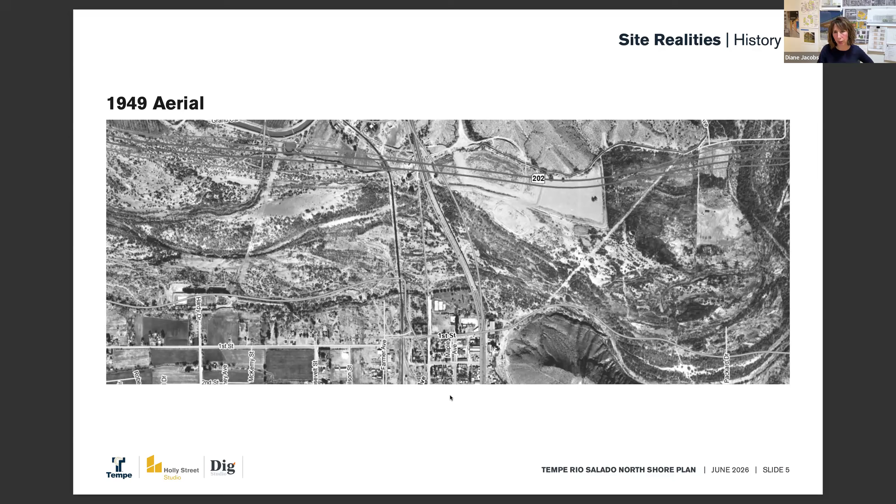We go back in time to understand how that influenced the landforms, the crossing, the enjoyment of this area, and the very important mitigation of times of flooding.

In 2018, Holly Street Studio put together a master plan that began to define kind of activities that could take place based on the topography and connection points and many other things, the activities that could take place around Tempe Town Lake.

And you can see, for those of you that have been in the valley since then, that a lot of these activities have taken place in terms of passive and active recreation and development, both public and private, along both the north bank and the south bank of Tempe Town Lake.

What's interesting is that the loop is pretty well traveled, but the northwest portion, the activity zone that we're here to talk to you about, is still kind of in need of activation, revegetation, and other things. So that's what we've been focusing on since the early part of this year.

In 2018, we decided with all of this information to put together a series of guiding principles. And again, this came from a lot of you and from all of kind of the analysis of the area.

And the guiding principles for Tempe Town Lake was that this area is really something that should be embraced by and owned in many ways by the public. There should be a balance between special events and everyday experiences, but this is really a place for everyone.

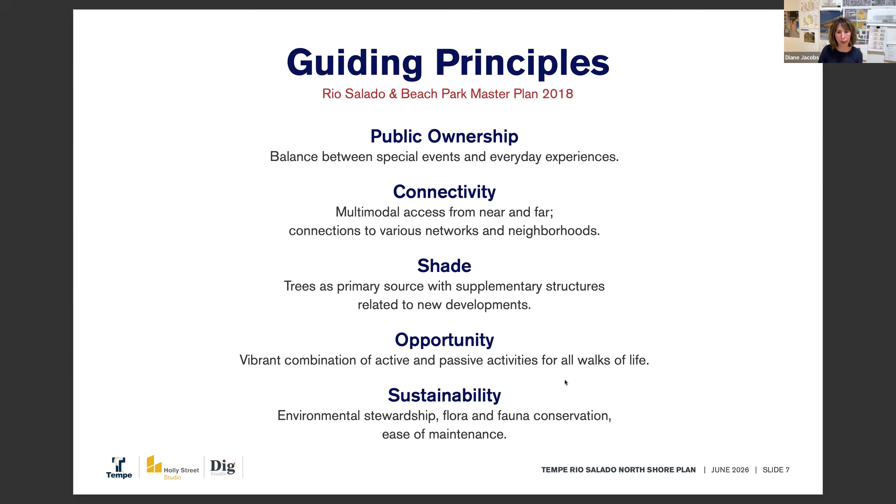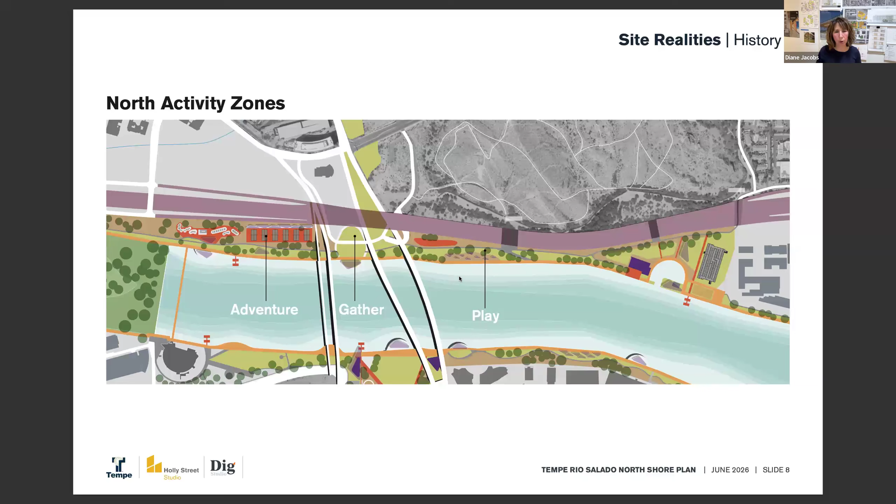So now, as you know, we're focused on the North Bank. The way we were able to define this area was to use the topography as an understanding of what would be possible there. The west side of the North Bank was designated as an adventure zone, and we'll get more into that as we move along. The center portion, directly connected to parking, the Marquee Theater, and other access points, we think of as a place for gathering. And finally, on the east side, we are connected to the marina and other active zones like volleyball courts. We are considering this area as a place for play.

Now we're going to talk a little bit about why this came to be. Sorry, go ahead, Brandon. No problem, I was excited to talk.

As we touched on last meeting, for those who were able to join, the next step as we progress from a high-level master plan into a detailed concept plan was getting into site understanding and understanding the constraints and opportunities that exist in this interesting piece of property bordered by the 202 and the lake. One thing noticed immediately was the lack of ecology and vegetation on the site, and a desire to restore that and connect to our neighboring parks to the north, the Lo Piano Bosque and the greater Papago Park system.

I think there's a tremendous opportunity with that. And as Diane mentioned, the significant amount of topography on the site, both ducking underneath the 202 and also reaching up towards it, offers some challenges but also some amazing opportunities for program and views. Next slide.

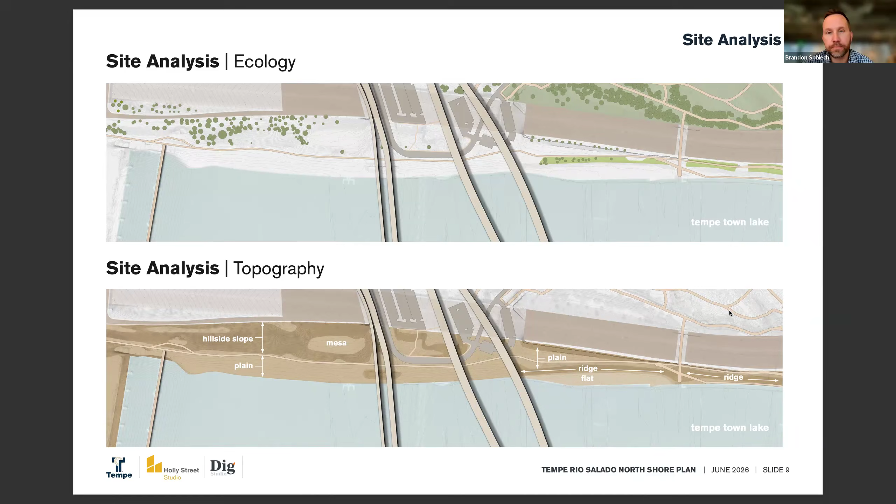Ownership is something we've continued to uncover in terms of operations and restrictions and what's possible, from what the city of Tempe owns to what the railroad owns, to ADOT's land. All of these things factor into what can and cannot be built in certain areas, as do underground constraints you can't see when you're out there, in terms of various easements, overhead power lines, underground sewer and water — a network of regional infrastructure that winds itself through this area. Next slide.

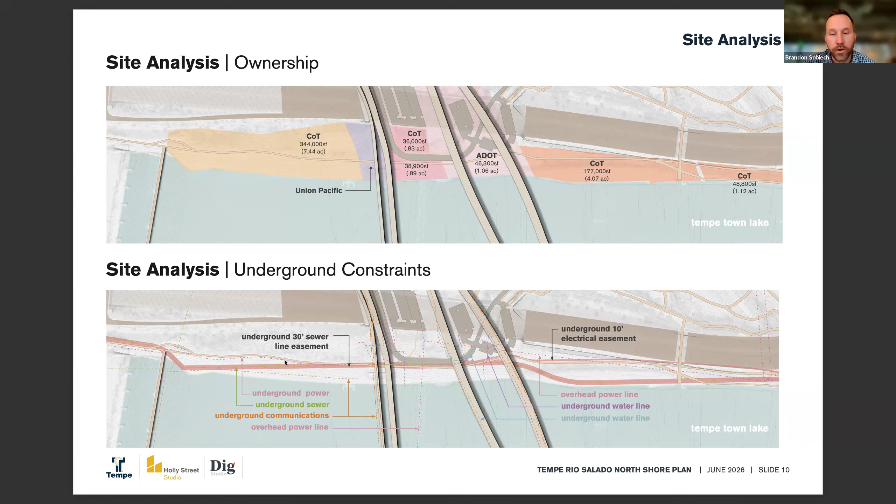And then you can't forget about the intent of the lake, that this is a river and it does fluctuate and flood, and there's a major flood control aspect of this project. We need to respect that levee and what it provides in terms of safety and flood control, and also consider access and parking — understanding the spaghetti network of how to get down there, what's built, the limited room for expansion in terms of parking and access, and how we can potentially increase that. Next slide.

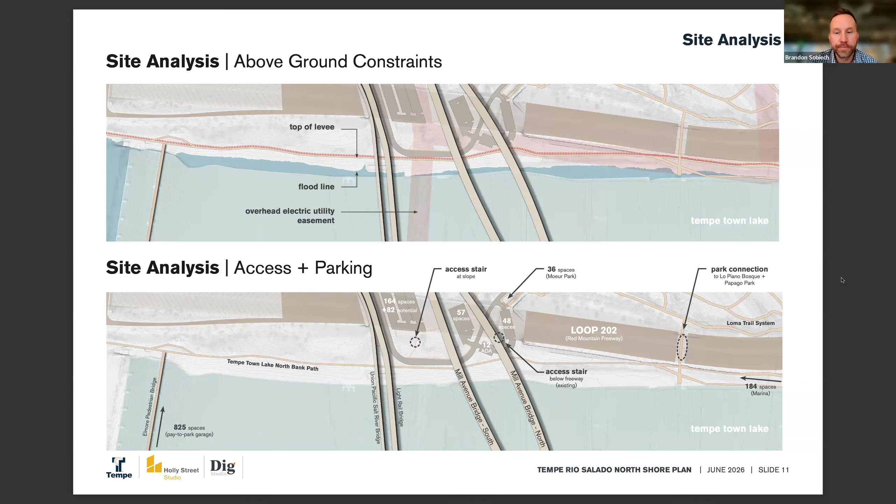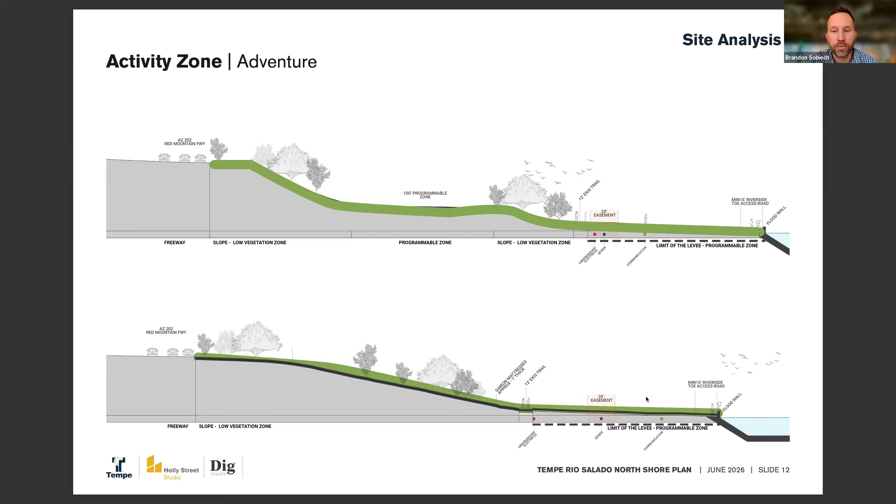Secondly, after looking at a plan view of all these things laid over, one interesting thing about this piece of property is how much it expands and contracts in width, and the topography that comes with that between the 202 and the lake. So this was working through the different zones, taking a sectional look at the park, understanding where opportunities may exist to create program and landscape opportunities. Underneath, in that black dashed line area, is the limit of the levee. We've met with the Flood Control District and understand some of the constraints around that.

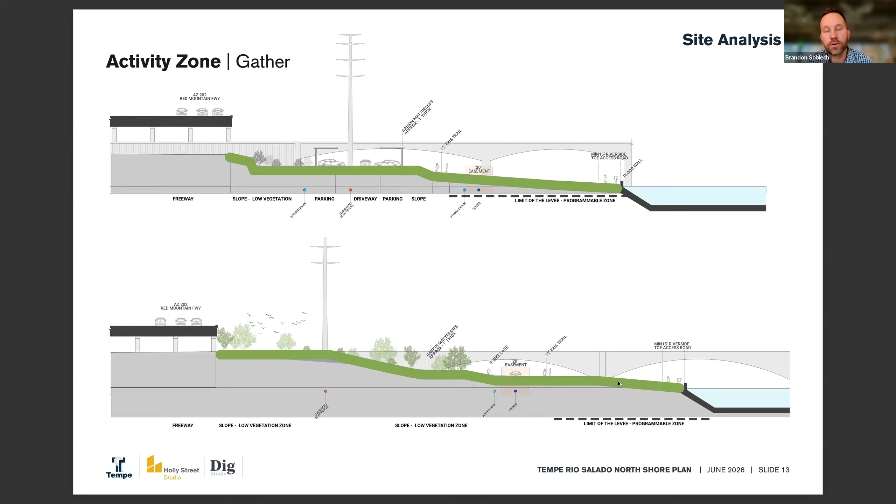But also some opportunities to revegetate and make that area very nice. Especially when it becomes the center of the park, it gets much more dynamic with the bridge section, overhead power lines, and connections under the 202 — a lot of things to consider as we look at plan layouts. Finally, as we move furthest east towards the marina, the section gets much tighter and includes reinforced subgrade sections for the levee that we need to be aware of, but also opportunities to connect to the north through these little passages under the 202 that can be activated in a creative way.

Just a quick comment about these analysis slides that Brandon was describing. On a certain level, if you look from up above, it seems like this tiny little spit of land, but it's important that everybody understand it's 20 plus acres with quite a variety of topography. With the freeway there's almost an impossibility for a project like this, but when you really walk the site at different times of day and look at the topography, the different slopes, and the adjacency to the water, it's quite interesting and exciting. It's kind of constraining, but pretty wonderful when you look at the different opportunities.

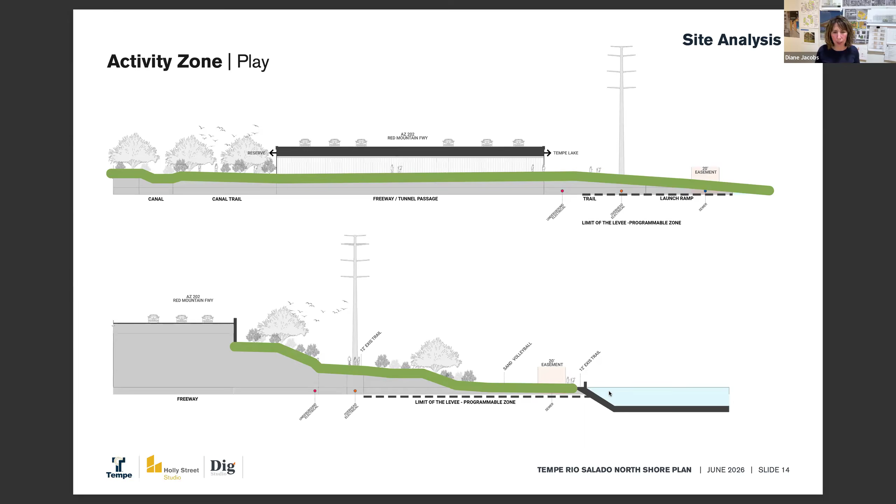So let's talk about public input. At the end of March this year, we got together and shared some of these ideas. We had a little less in terms of a design strategy, but a lot in terms of analysis and precedent in other cities. We spent time together actually looking at the site because we were at the Tempe Center for the Arts, and we did an overview of the project.

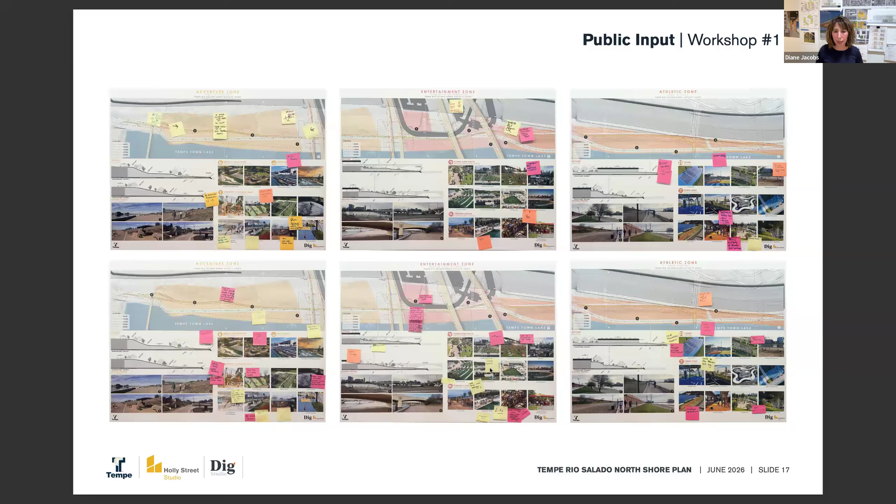We invited folks to come and talk one-on-one and share their opinions about what we had found and their desires. We spent a lot of time, as these meetings allow for, writing on Post-its and getting a lot of really great ideas about what was desired here, plus input about what most folks wanted to make sure didn't happen in this zone. You can see some of the photographs of the board and the long table maps we talked over and spent time on together.

Let me go back a second—this is going to happen again tonight, so hopefully some of you can join us.

With the help of the city of Tempe, we issued an online survey, and over 1,300 folks went online and took a look at what was going on. We got over 1,000 responses, so there was quite a robust amount of public comment and input on this project, which makes our job a lot easier because it's really nice to get these ideas and input from the city.

So the key takeaways, and there were many, but I'm going to go over 12 key points. There's a lot to them, but let's see if we can generalize a little bit so we can get to the concept plan.

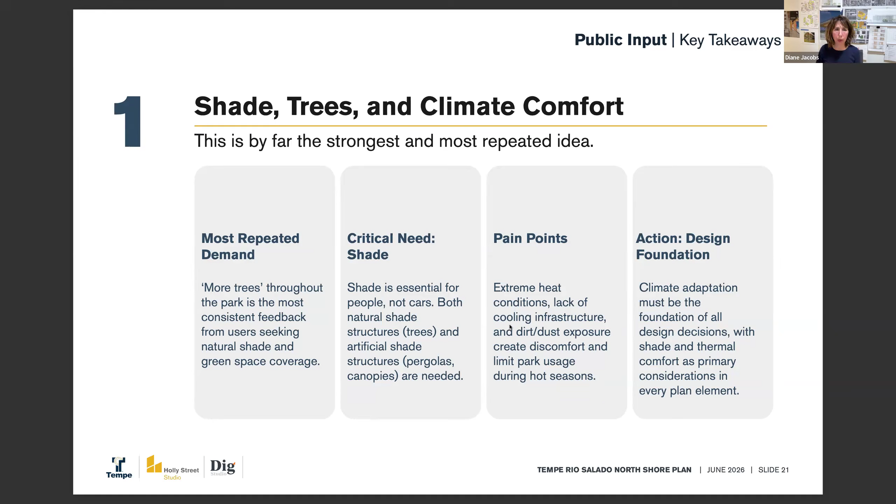By far, the strongest and most repeated request was that this area embrace shade, trees, and comfortable microclimates. No one is surprised by the essential nature of shade and the extreme conditions along this path, and in order to use it, that should be a critical component of our design.

Again, you are just south of Papago Park and the Sonoran Desert. The idea here is that we use this opportunity adjacent to water to make sure the lake connects to an ecosystem that is natural, alive, and embraces the desert landscape.

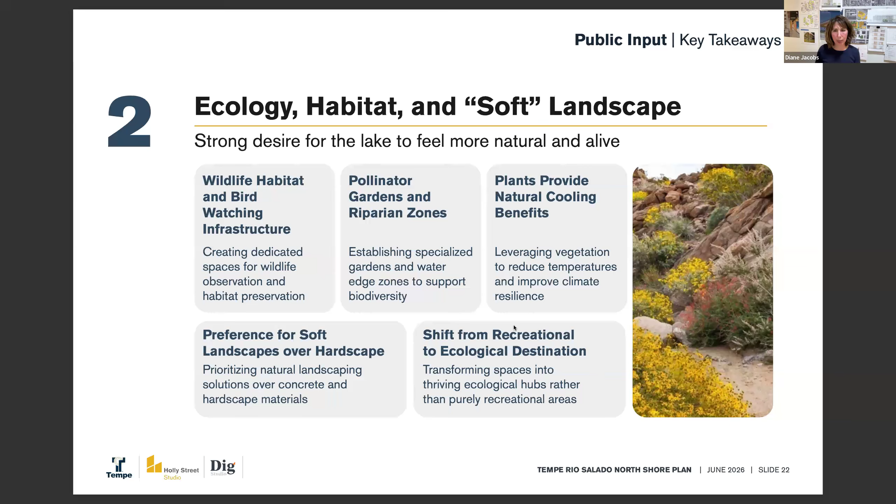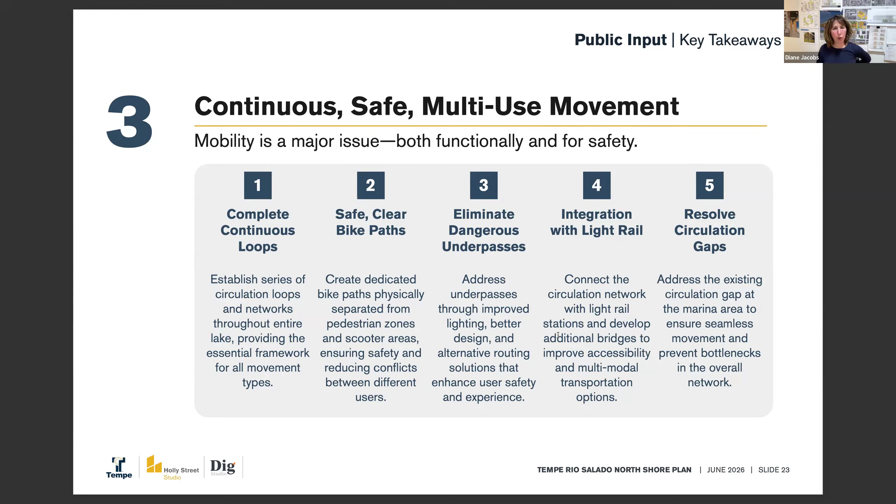Making sure we embrace the idea of the Tempe Town Lake being a continuous, safe, multi-use pathway—not just for people walking, but for bicycles, skateboards, all different modes of travel, with integration with the light rail—and making sure we resolve some circulation gaps that exist when you look at some of the pathways currently there. People in Tempe, and people in general, like to move and engage in recreation and fitness.

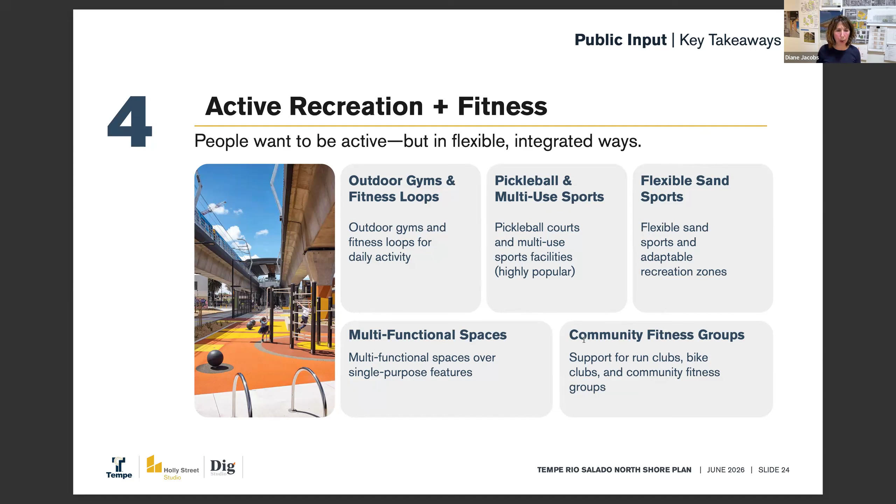Again, it looks like a thin strip of land from far away, but it's actually quite a bit of acreage where we can encourage outdoor gyms, fitness loops, and other sports activities, passive and active. There are ways to connect with partners who can come in and participate in the expansion of programming and different opportunities along the North Shore.

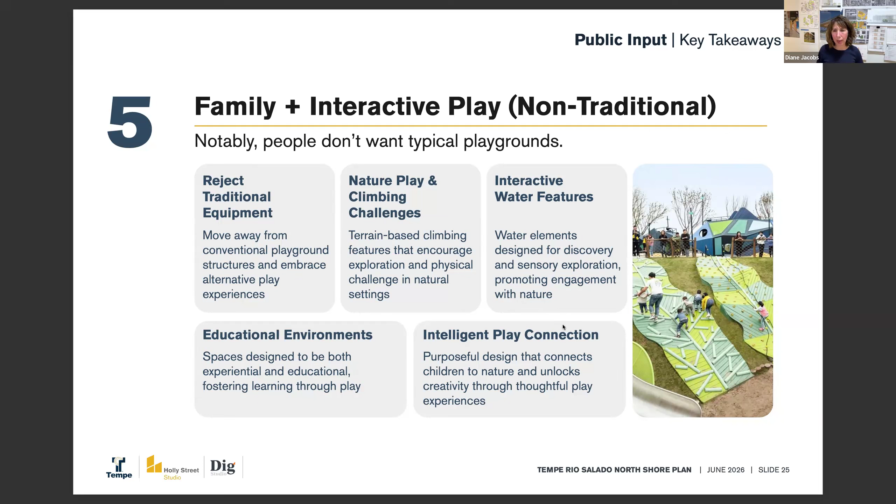Families love to frequent this place. This is a public area that should last for many generations and help continue to create memories. But it was important for people that this not just be like a city park, but a place with interactive features, nature play, intelligent play connection, educational environments—kind of a rejection of traditional playground equipment for this area. The topography and adjacencies of the pathway make this a wonderful place for that to happen.

And of course, being right across Tempe Town Lake from Tempe Beach Park, the idea of consistent programming—maybe smaller scale entertainment, organized groups for fitness, festivals, and other activation opportunities—were important to the survey respondents as well.

Food, beverage, and light retail, and something more, integrated with nature and activities taking precedent. The idea we heard back from many people was that it would be great to have smaller scale food and beverage opportunities there, like cafes, locations for food trucks to park, maybe micro retail, a place for festivals to occur—not necessarily commercialization, but places where these sorts of things can come and go, or maybe live there in an integrated way.

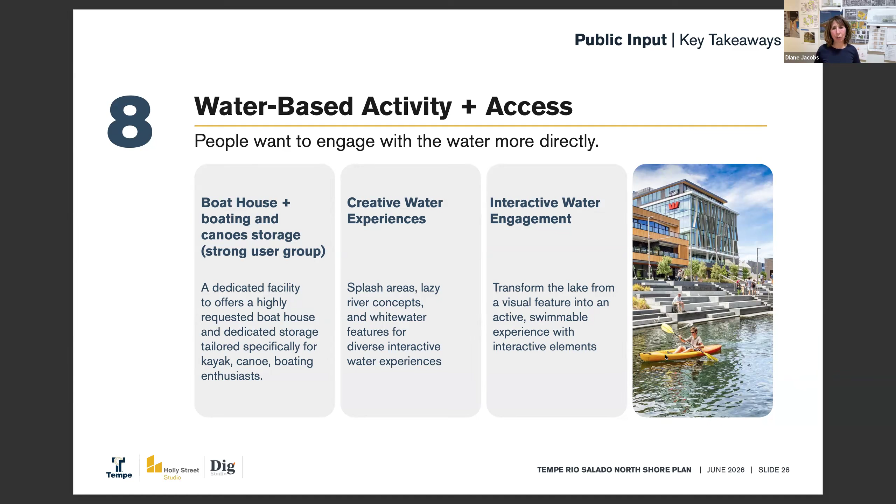Water-based activities. We're reminded by our engineer colleagues at the City of Tempe and many others that Tempe Town Lake is not a swimming hole, but that doesn't mean we can't lean into some creative water experiences along Tempe Town Lake. That was something embraced and talked about in our surveys.

Identity, art, and uniqueness. This is something we like to embrace when doing projects that can have an artistic nature to them, like multi-sport courts or play zones or different signage and wayfinding—not necessarily art as an object per se, but sort of artful play and integration with the amenities that are there.

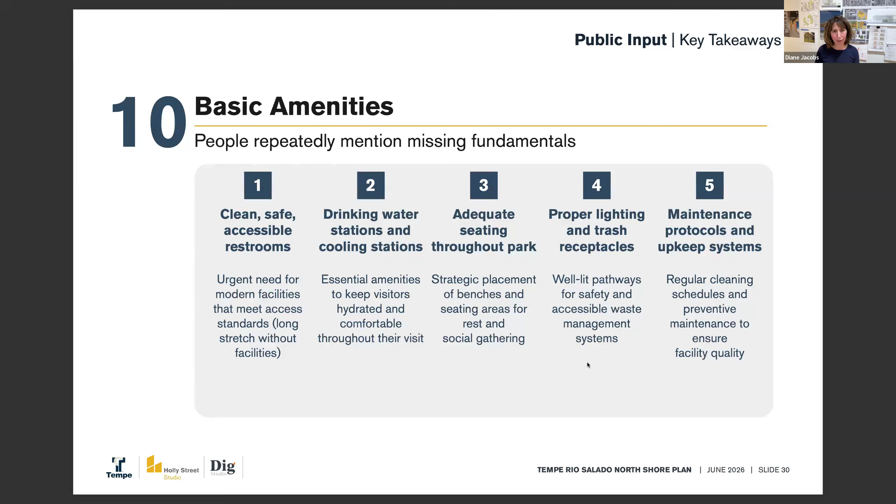Finally, the need for basic amenities: restrooms, drinking water, seating, lighting, etc., making sure it's a place that is easy to keep pristine and lovely all year round. That goes along with safety, cleanliness, and maintenance.

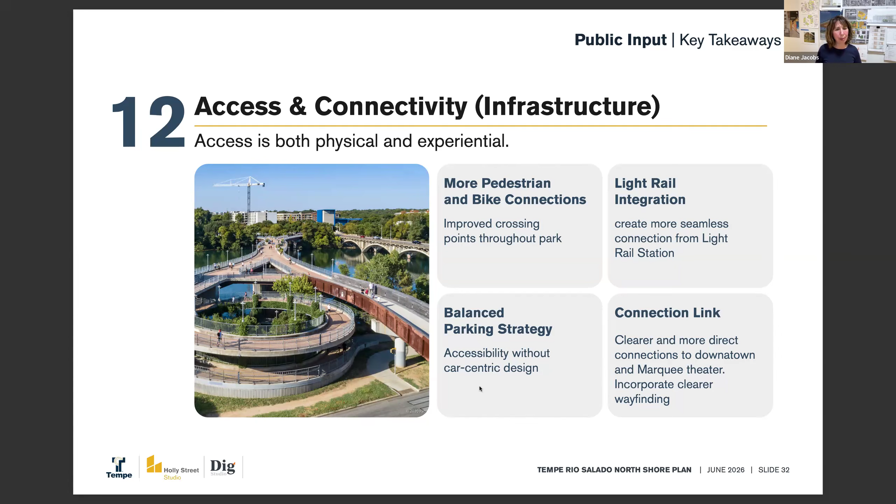Number 12 was access and connectivity, making sure folks can arrive there in ways that align with accessibility—maybe not car-centric arrivals, but also pedestrian and bike connections, connection with the light rail, maybe even connections from the Mill Avenue bridges. So being able to walk across and come down to this zone with relative ease, and maybe some celebration, something playful in that way as well.

So after listening to everyone and incorporating some of the analysis, there are some emerging ideas that are leading to a conceptual plan that we'd like to share today.

We see 10 design drivers for this plan under 3 categories: site conditions—the reality of that area and what we need to work with and around; public aspirations; and the possibility of partnerships, collaborations, enhanced amenities, making sure communities like the boating community and gardening communities have opportunities to connect and help make this place not just something run by and funded by the city and taxpayers, but connected to other endeavors as well.

So Brandon's going to take us through what these drivers mean in physical form.

Starting with the site conditions, not to state the obvious, but to state the obvious—the water obviously plays a primary role in its effect on the park space, and that visual and physical connection to the lake corridor.

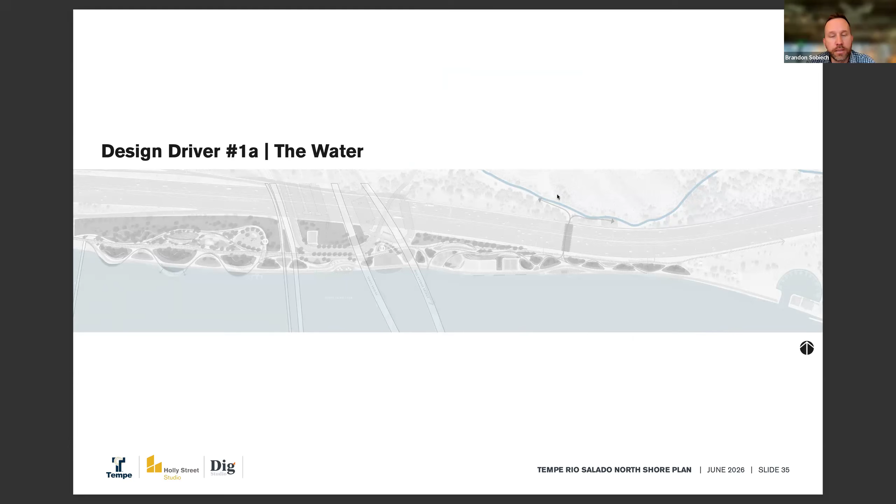The response to that is this desire to continuously engage with the water and offer more chances to interact, view, stop, and reflect along the bank itself. So beyond just an access or maintenance path, how can we create a promenade with a lot of different things going on, offering a variety of ways to interact with the lake edge.

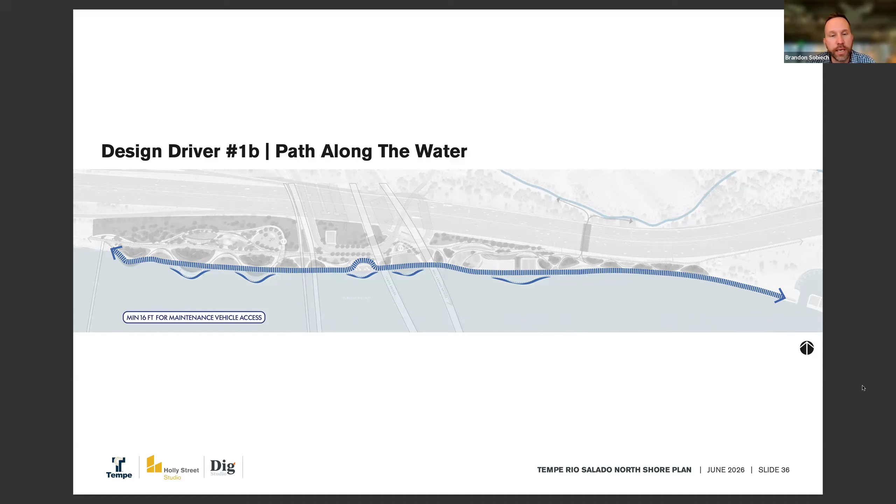The second design driver is what we talked about from the sectional cuts—the levee and the restrictions that guide any... getting some background noise... and any restrictions that may exist from the levee itself.

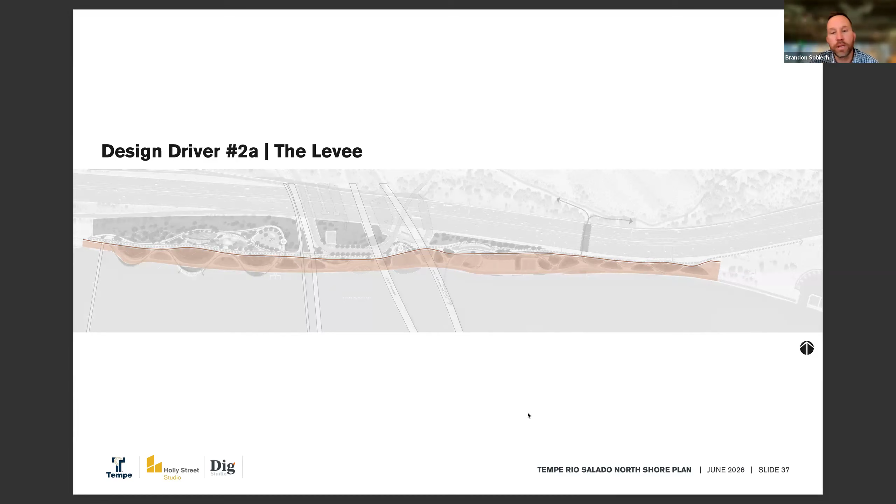But there's this strong desire for movement that happens on top of the levee in the current multi-use path configuration, which is also needed for logistical reasons as well.

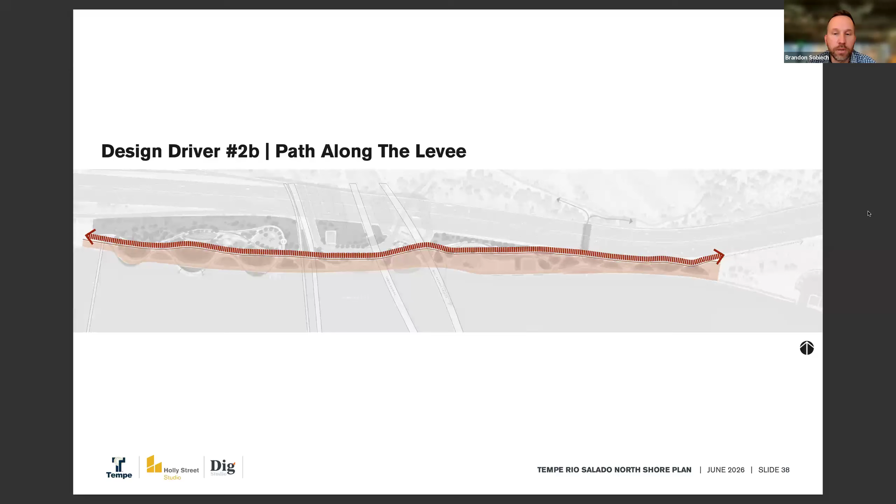And then we see a tremendous opportunity with this green space that we're calling the slope, both from program, from view, and from vegetation.

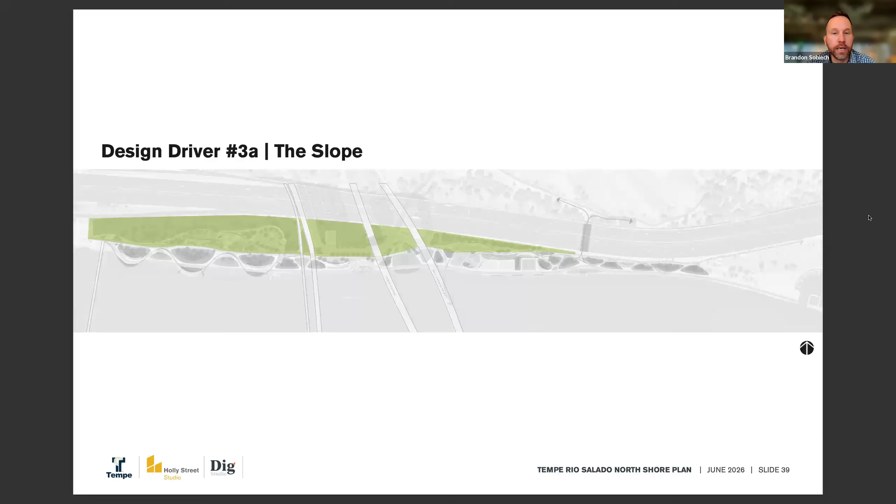And to also create a secondary path system offset from the multi-use path that allows for this more passive, park-like experience that goes at a slower pace.

The final site consideration is this idea of connectivity, like Diane was mentioning from the 12 summaries from the community engagement—looking beyond the limits of work of this North Shore and how this can connect regionally in different ways.

The first is looking at the Mill Avenue Bridge system, especially with the multi-use path, and how we may be able to create a direct connection down into the multi-use trail system. We're also looking north through the 202 to the Lopiano Mesquite Bosque and the Papago Park area, and how we can connect to that regional trail system, as well as looking fully east and fully west as Tempe Town Lake ultimately completes its loop trail.

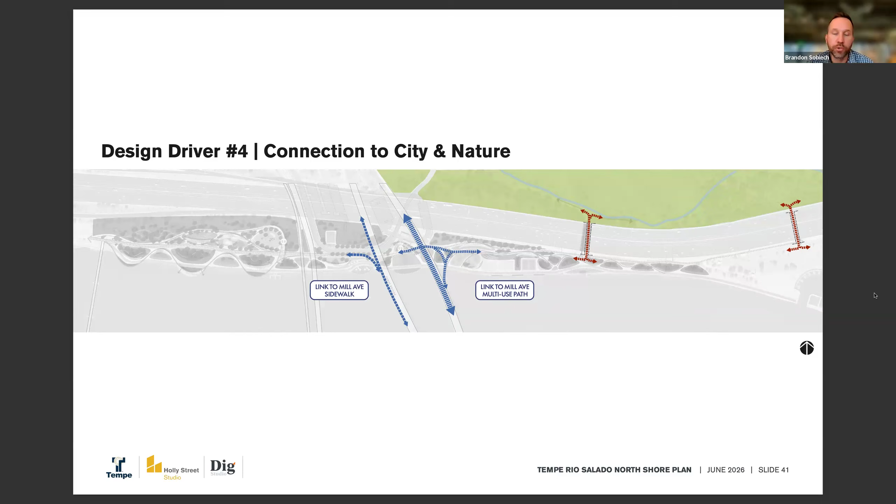So what does this mean for stuff to do? A big part of the design driver, in addition to the site issues Brandon mentioned, is how to put things along this pathway that give us a reason to stop, to get together, to stroll, to move through, or maybe just cross through on your way to another activity at another location.

You can see along the entire North Shore Park that the southern portion needs to be relatively quiet in terms of construction because of the levee requirement. So the activities on the west side would be more on the adventure side.

We used to call this center section entertainment. There was talk about an amphitheater or other amenities like that, but we really see it more as a gathering zone. You'll see some areas, big and small, start to emerge in the plan.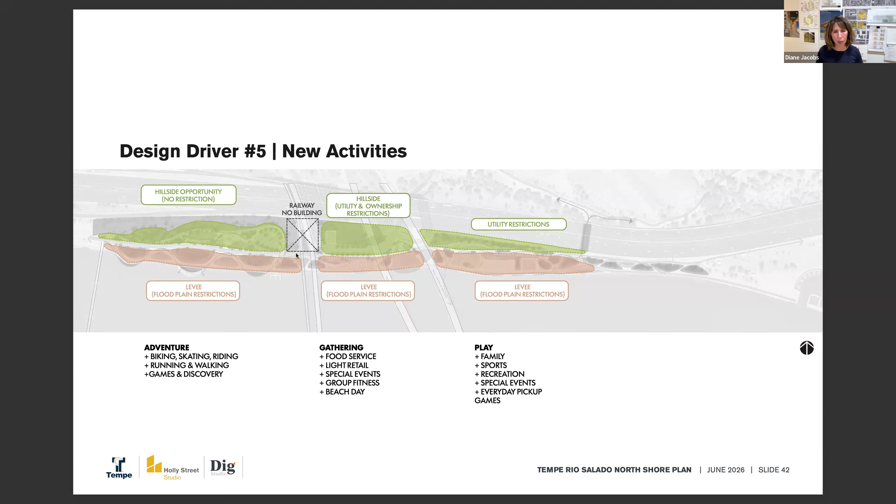The activities in this design driver are tied in with what the topography will allow, but also some playful opportunities with what's going on under the freeway, under the bridges, and how the paths can move through and along that waterway.

We also looked at access and logistics — what user groups are associated with each amenity, what that experience is like getting there, and how that shapes where the activity should occur on site. Because of restricted access and parking location, this is really a center-out kind of experience with a braid that winds it all together.

If you're traveling by bike or skateboard, it's a much different experience than traveling by car to go to a small concert or market or event, where you might have a cooler or a stroller with you.

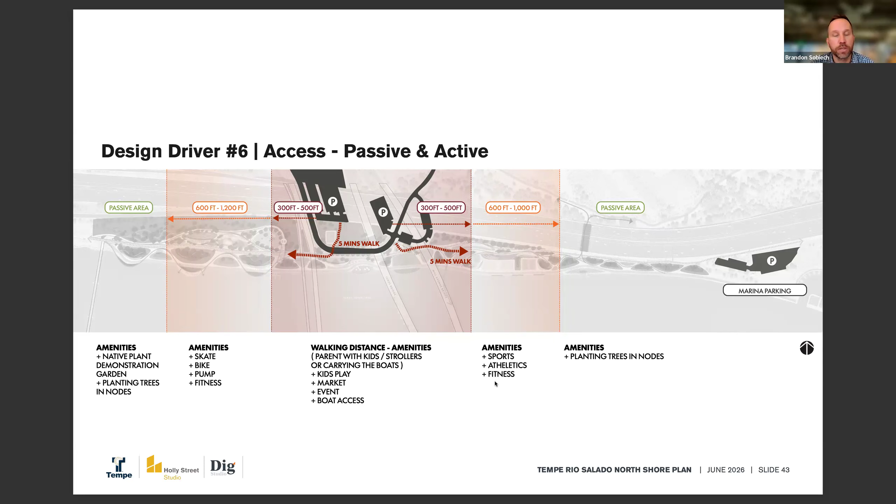Taking all of those things into account and applying them to the various amenities, this diagram starts to indicate where things like event markets, food truck areas, or playgrounds should go, assuming toddlers only have a certain walking distance, versus amenities like skate spots, bike spots, or fitness courses where the reach is much greater. We use this as a driver to help arrange amenities appropriately.

It's no surprise that art continues to be very important to the city of Tempe. Dig and Holly Street worked on the Clark Park project, and there was almost as much embracing of wayfinding art and playfulness because of the folks who participated as there was architecture and recreation. So it seems like this would be no exception.

We know from our analysis and countless walks along the North Shore that there are art pieces there with a connection to stories and people from the past and present. The idea is that this existing art is notable and part of the context and the drivers.

We also know there are opportunities at entry locations to create landmark moments that welcome visitors and connect to the broader community — could be interpretive, with information about what you're seeing and where you are, but also, like many cities, embracing underpasses and infrastructure with additional lighting and activation of these spaces.

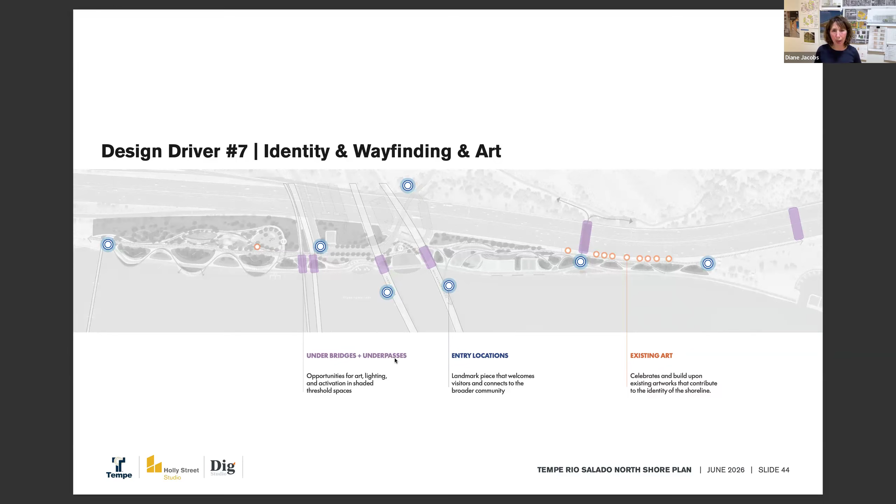If shade is so important to us, it makes sense as a community to consider the opportunities underneath and around things, in places where at certain times of year standing in the sun versus the shade makes a big difference. So using this design to help create identity, increase wayfinding ability, and integrate art directly into the amenities is important as well.

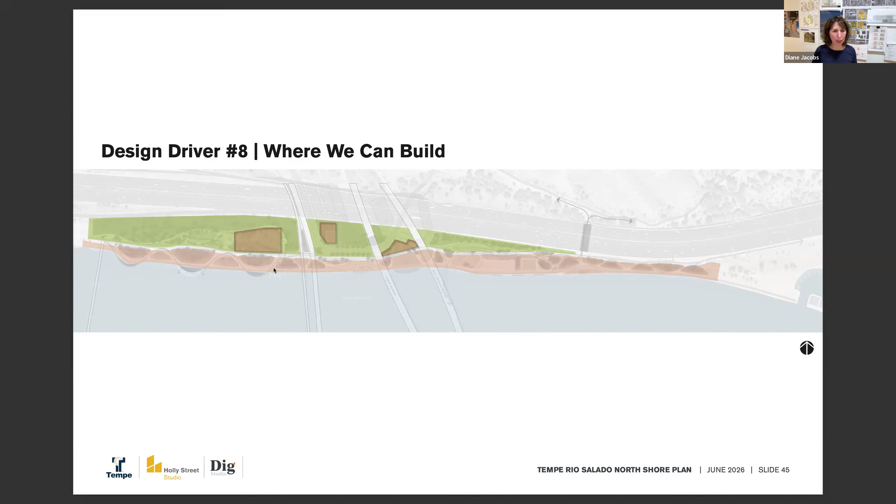We talked about opportunities to partner with different entities that might come in and help create activation. We have recreation play zones along the hill, where potentially the city works with someone that can provide adventure play, climbing, bouldering, outdoor active recreation. There's also the idea of partnerships for light retail and food and beverage of different kinds—restaurants, cafes, maybe small specialty retail zones and kiosks.

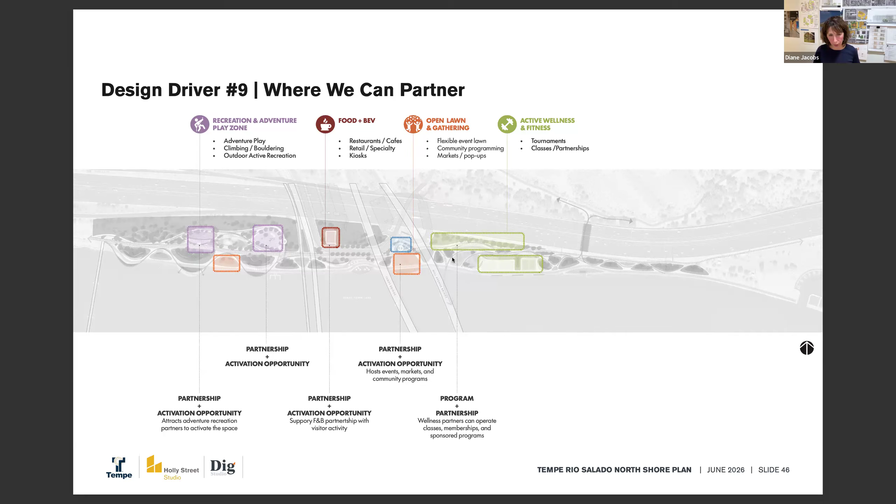And finally, design driver number ten is how do we, the city, and all of you prioritize and phase this project? There is a fantasy scenario where it's built tomorrow, but we all know the realities of this type of project.

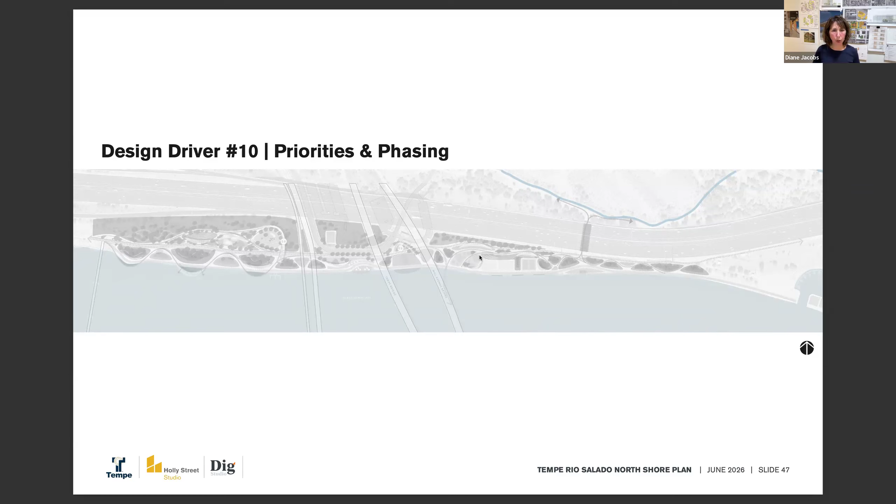This begins with a framework, begins with conversation, and begins with a concept master plan that helps new things happen in a controlled, organized fashion—one that embraces the tenderness of the land, but also the will of the citizens and the realities of the finances of how these elements come to be. So the design driver here is a conversation moving forward about what the priorities are, how you lay them down, and how you begin the work of phasing this project so it could come into reality within a certain time period.

So where we took this is we're presenting to you today the idea of one concept. Instead of little pockets where different things happen, we're presenting this as a strategy where we're creating a unified North Shore Park that addresses all the design drivers we talked about. In that singular park, we have adventure, we have gathering, and we have play—outlined as a strategy for how you might develop this area.

And the vision for North Shore Park would be something that stands as a counterpart to the energy of the South Bank of Tempe Town Lake. It's a true connection to natural habitats—you could consider all points west, north, east, and south, including the water and the lake, as natural habitats for this park.

Embracing a unique view corridor—anybody that's walked along the North Shore can see that looking back at the city is quite spectacular. It's very different from any other spot on Tempe Town Lake.

This area is a special and protected recreation destination. By protected, we mean it's not out in the open subject to other urban forces, maybe cars or highways, but nestled up against the water and up against the freeway, beginning to embrace this as a special place.

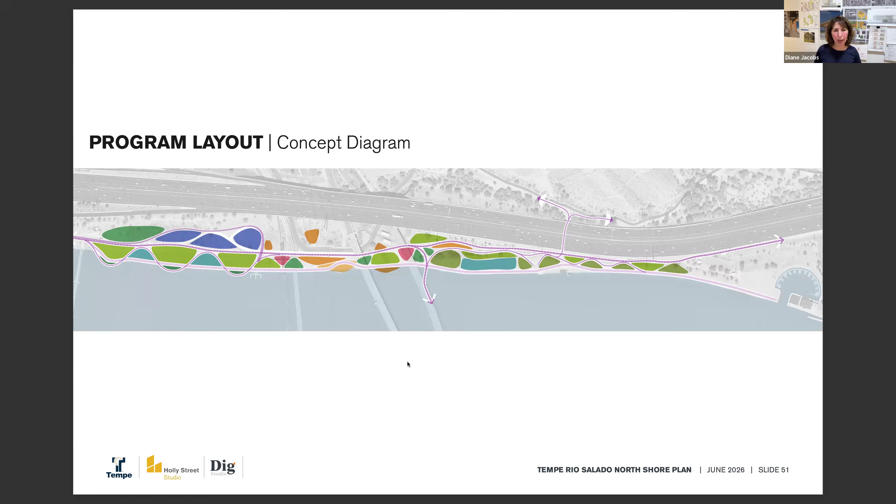And notably, the North Shore Park is a stop along a well-traveled path. The idea is that the path continues along Town Lake, and this is one of many destinations. The concept diagram begins to show how those paths and the spaghetti of the wires below and above, and the bridges, help us understand how these areas would be shaped and how the paths and nodes can come together to form a plan.

And here we have the concept diagram that we will be presenting tonight. So Brandon, would you like to share a little bit about each of these areas and what folks might be looking at when they come by?

It'd be good to get into. There's a lot to kind of take in when you look at the full spectrum of the linear park, so we'll go section by section, dissecting each spot. But I just want to note, tonight's really about listening.

I know we're here presenting and talking about the ideas, but what we're sharing is all these lenses and layers we've used to build up what you see on the screen and the reasons behind why. But we're very mid-process, and it's a perfect time to discuss.

What's on the screen, the types of programs, amenities, and ideas we'll see today, and what resonates, or perhaps what doesn't, or what feels high priority or very important. That type of feedback today will help drive the process forward, especially when it comes to funding and phasing and what comes first.

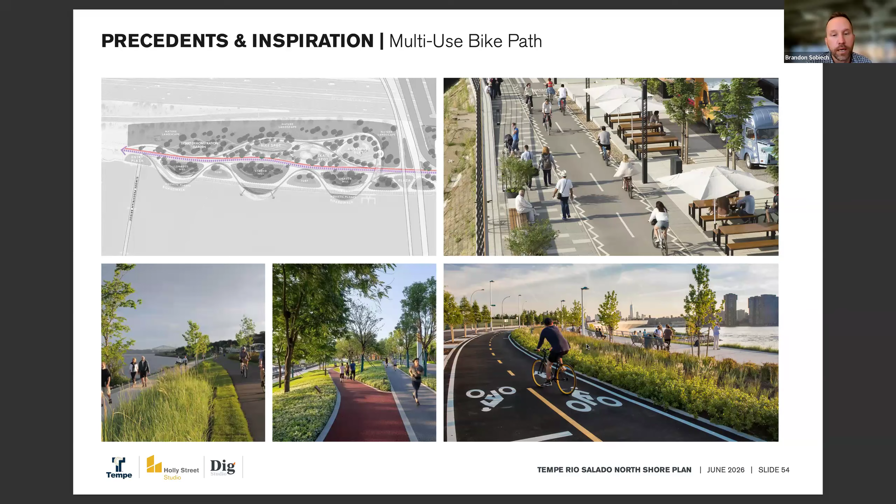Some nice examples of how that could work. The second idea is a waterfront promenade, not just the boardwalk along the edge, but how we restore green along that entire edge. This is the levee area, and there are restrictions to what we can do there, but there are creative ways to revegetate that edge, working with the flood control district, creating a landscape more appropriate for a river edge, with moments of exploration, view, and program within it.

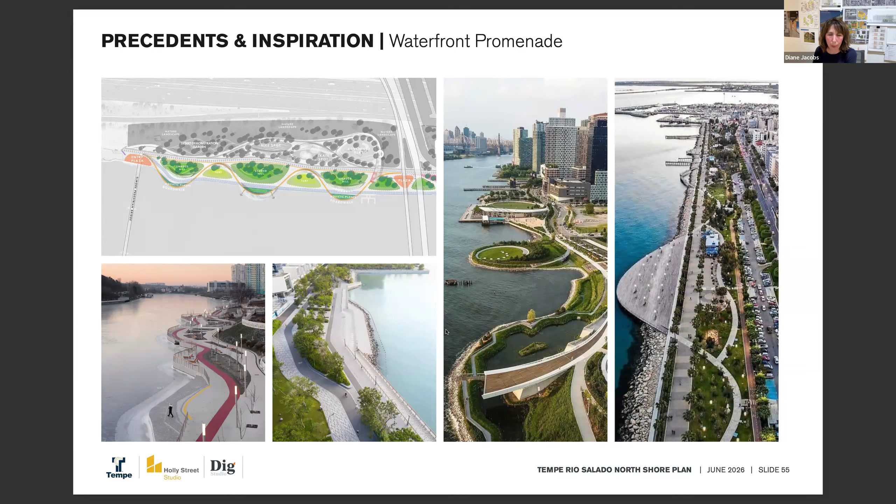It's important to mention that the connection to the water, or the integration of landforms with the water's edge, will take into account the delicate balance of water volume in the waterway relative to the edge of the park itself. It's not our intention to take up water volume, but to connect to it in a way that brings you just a little bit closer.

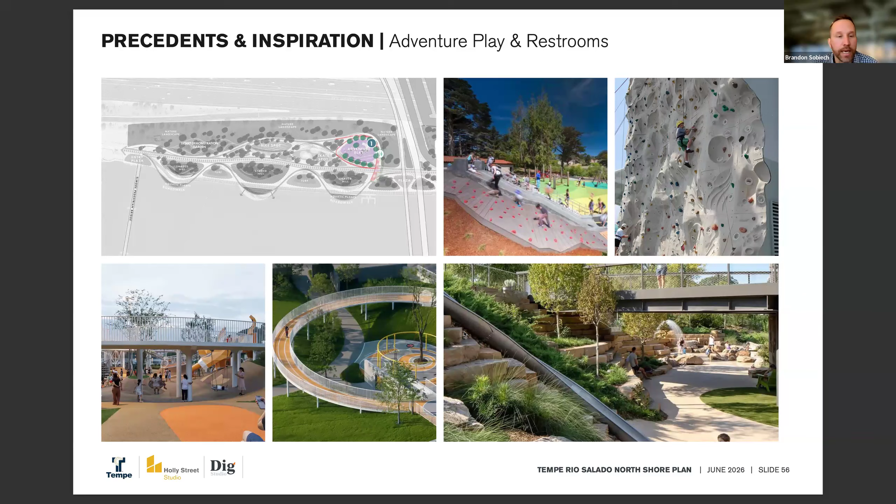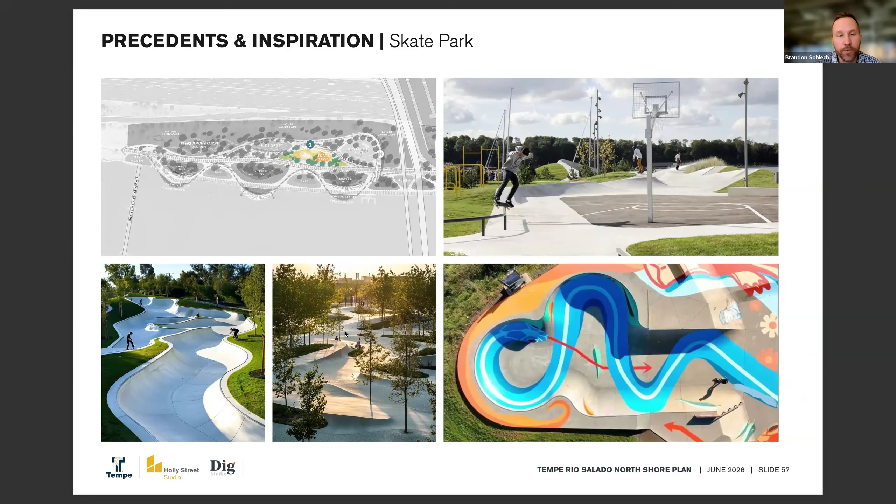Okay, so we'll go quickly through these. Like Diane mentioned, non-traditional play environments in that slope area create really cool opportunities for sliding, climbing, and integration with the natural environment. The idea of skate spots and bike spots, these little interventions in the landscape, create activity for teens and children, and also provide opportunities for integration of art, so art, amenity, and program are all interwoven.

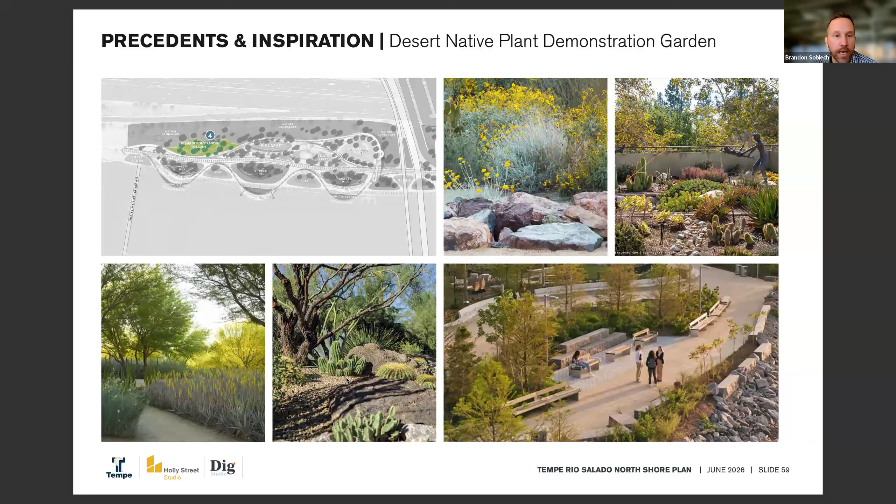And then this connection back to the natural environment, and making that inherent connection back to the desert and Papago Park.

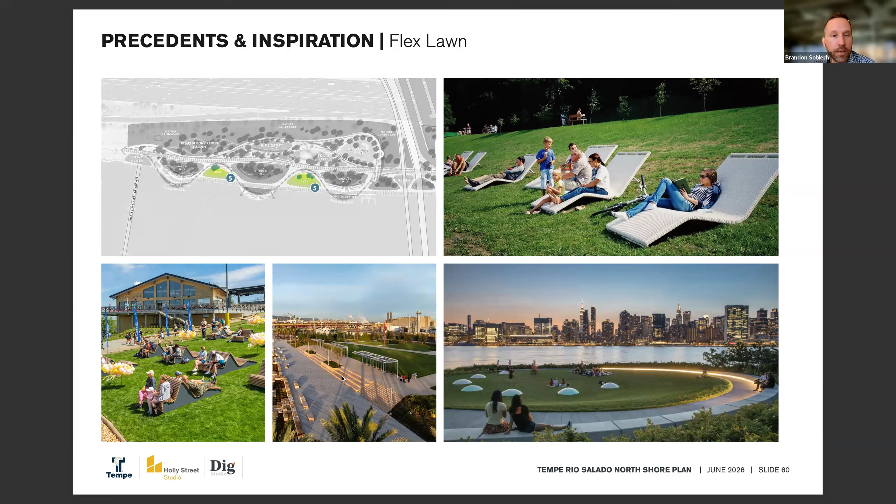Within the bank itself, or the levee itself, we're creating opportunities for viewing back towards the Center for the Arts, viewing back towards the iconic railroad bridge, just these kinds of passive lounge areas. Next is the idea of restoring ecology, using landform in a way where we're able to grow material, and the number one requested program item is tree shade, getting tree shade back on the banks.

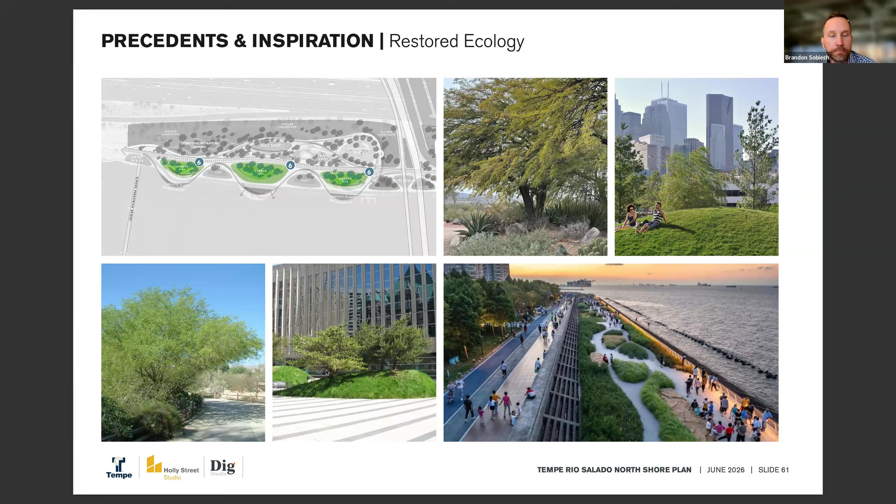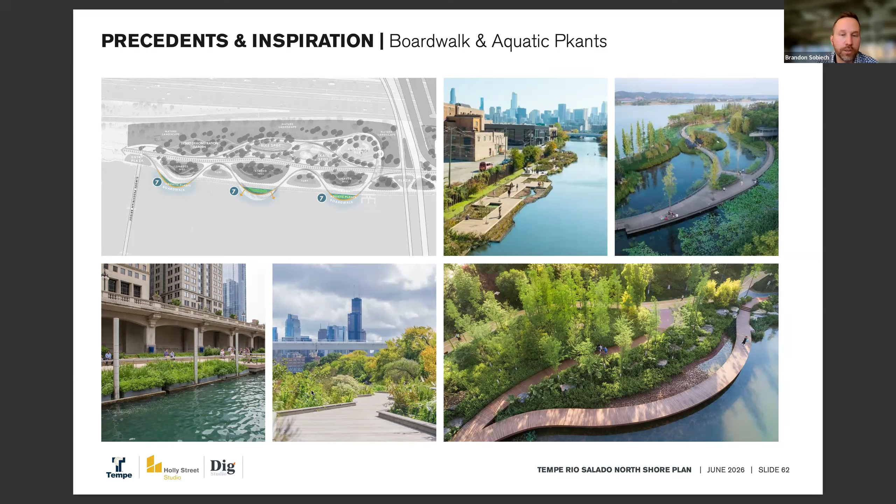Looking at ways to actually engage the water, where you're physically able to go out on it. There are a lot of boat docks and other things on the lake edge currently. Integrating aquatic plants, finding interesting ways to engage with the water's edge. And opposite of being on the water, being above it, recognizing the slope and the possibilities of lookouts that capture the view back towards the city.

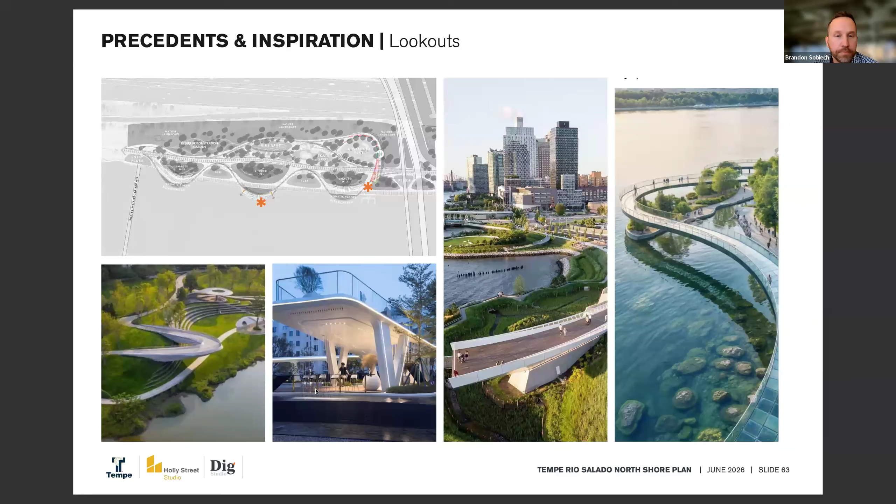Adjacent to that area is what we're calling the entertainment or gathering zone. The layout calls for things that benefit from the roadway directly north of the gathering spot. Currently there's also the boat launch and the bridge. The idea is mini plazas underneath both the railroad bridge and the two Mill Avenue bridges — anyone who's been there at sunrise or sunset knows that's a special vista. There's a perfect spot nestled between the two bridges for a small gathering stage, perhaps a place to do yoga or hold a small concert.

This is in the okay-to-build zone. We could have amenities like restrooms and food trucks along the promenade. It says Market Promenade, but that's meant to be more pop-up and temporary, where folks can park along here with retailers, or better yet, food trucks. Maybe there's a brick-and-mortar food and beverage component here that also looks out onto the lake.

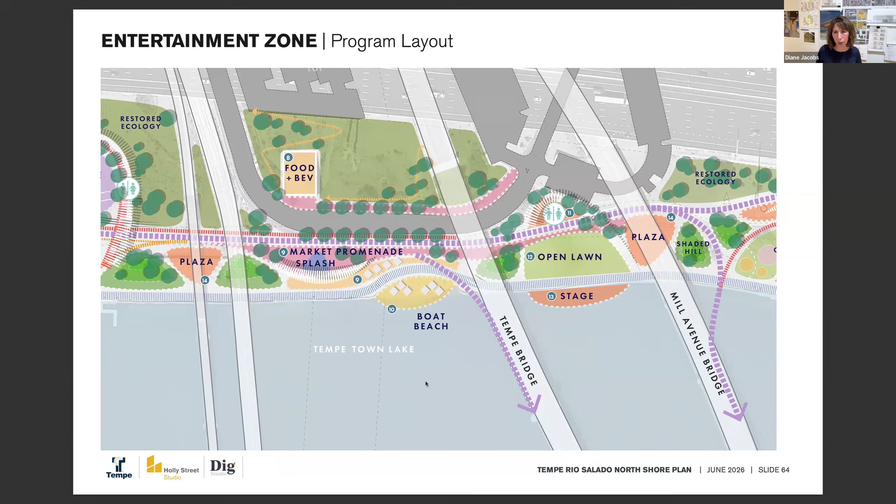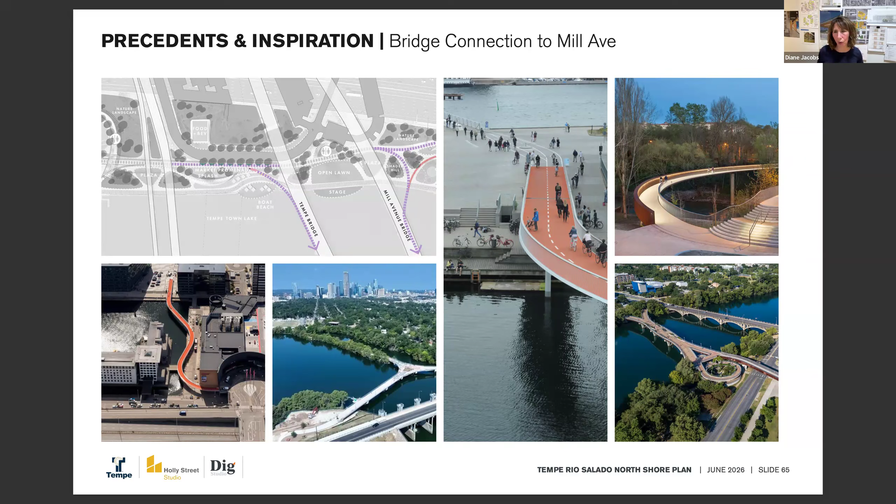This area is comfortably nestled between those bridges and allows for really interesting viewpoints. Integral to our ideas is connection to the Tempe and Mill Avenue bridges, with perhaps a sculptural element that takes a pedestrian — or in some cases a cyclist — down from above onto the promenades. You can see some of these forms in our precedents can be quite playful.

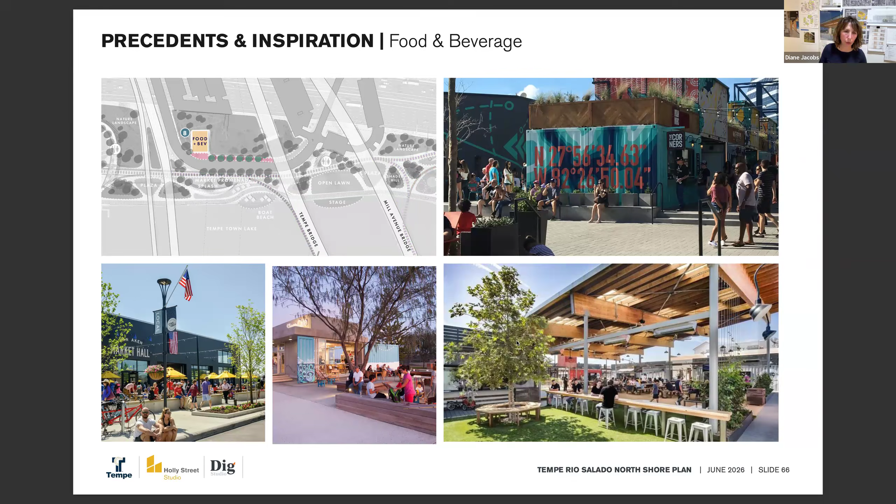Again, the food and beverage component isn't meant to be particularly large, but something flexible and open that can showcase different opportunities for vendors — a bit of market, maybe some splash zones — but again, integrated. That's our key word.

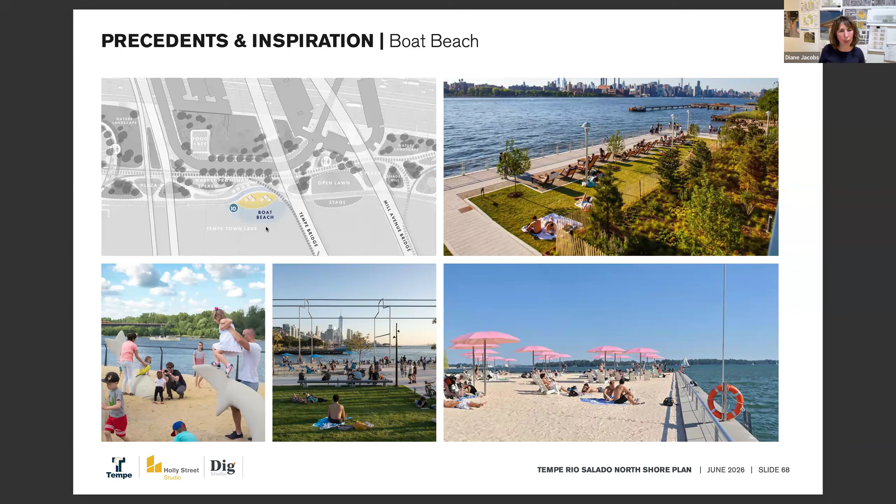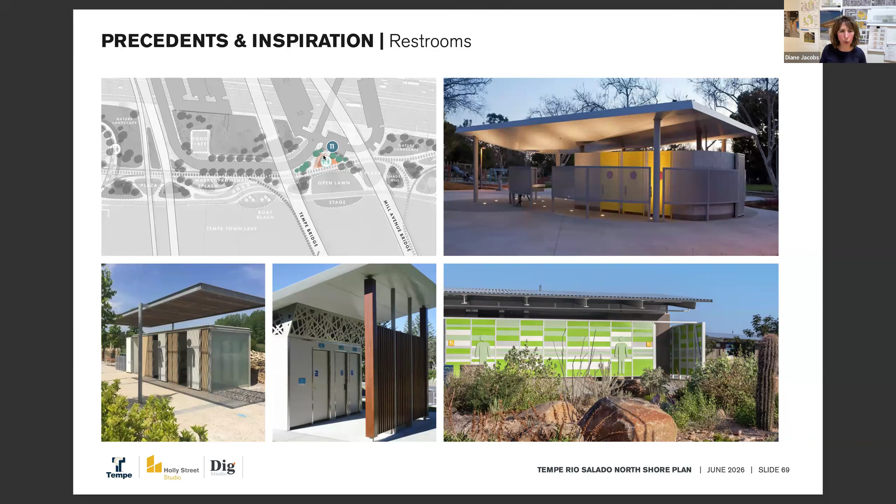The beach that exists there now — in the morning you can see folks bringing boats down through here. This feels like it could be embraced as a gathering zone with sand, umbrellas, and play looking directly out onto the water. And of course the ever-important restroom idea: a kiosk that's open, safe, easy to clean, and dispersed throughout the park, with a potentially slightly larger one along here with some of the amenities we're talking about.

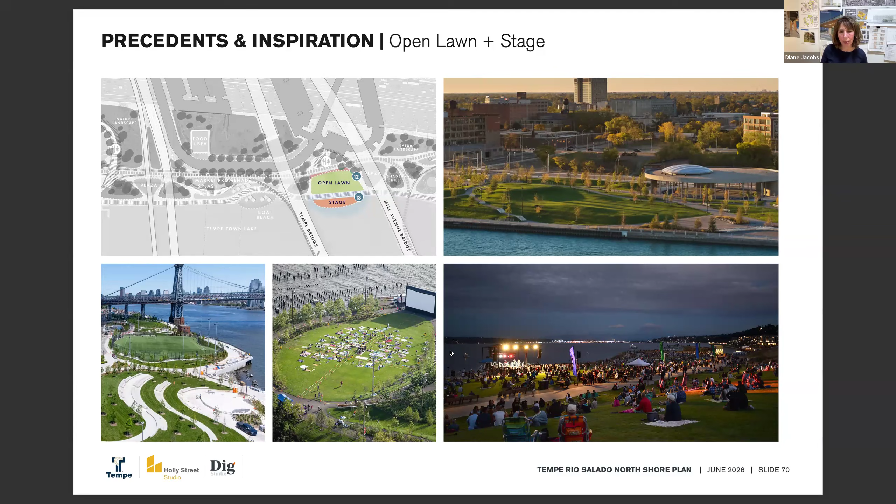The open lawn area might look like a smaller version of something like this, but wouldn't it be nice to see music along the lake while watching the sunset, doing some kind of fitness activity, embracing that portion of shade along the bridges. And there's an opportunity under and adjacent to those bridges — like over at the Mill Avenue Bridge — for a little plaza, a photo opportunity, maybe artistic displays, exhibits, or interpretive components in those small plazas.

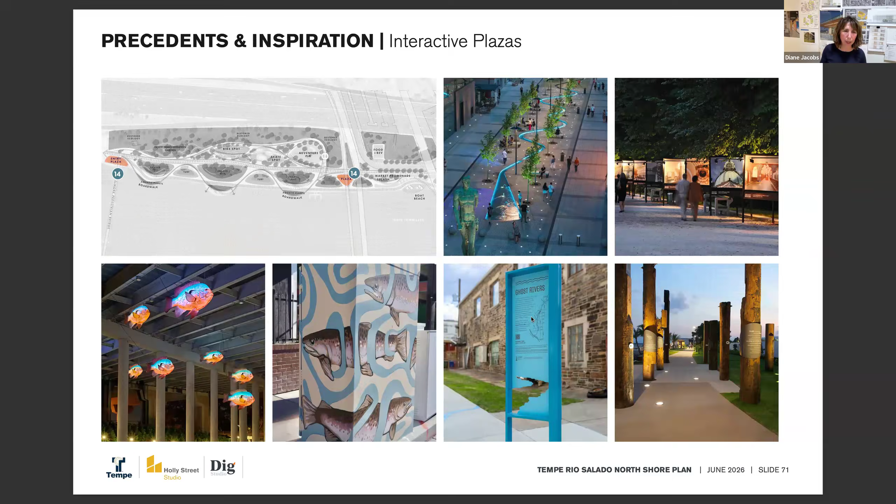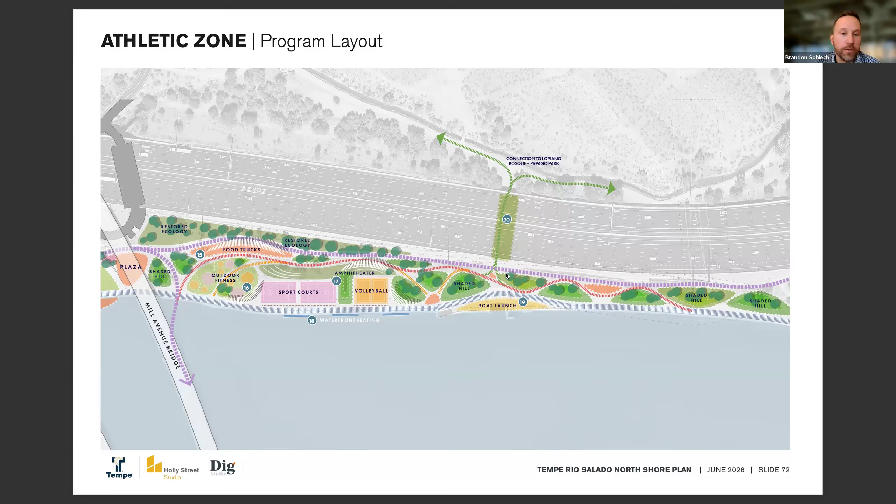There's a lot of enhanced connectivity that could happen in the zone along with active recreation.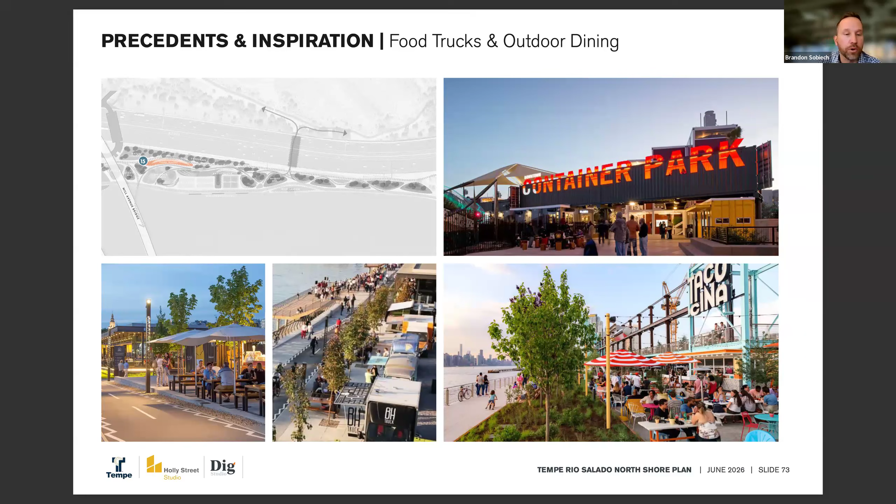We find an opportunity up on the north piece for a food truck that could support local tournaments and activities that could be happening. There are some really nice pictures of how that could occur along the multi-use trail on the bottom left.

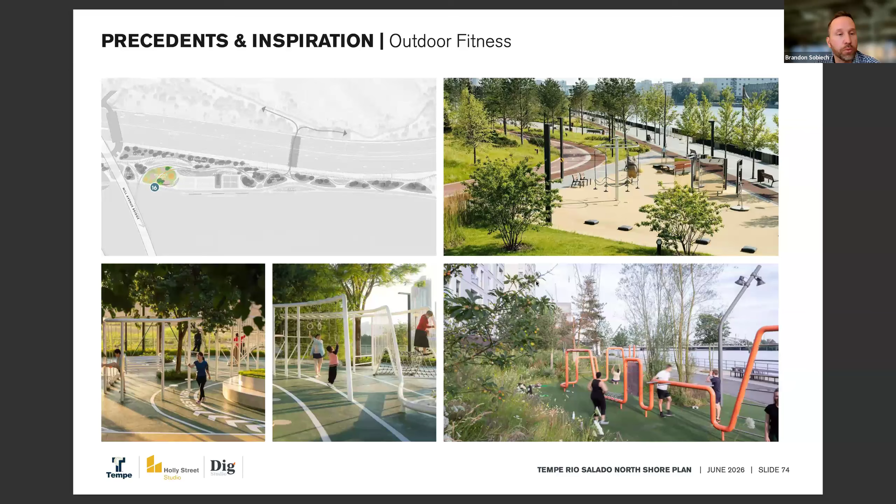Integrated fitness again works well with active rec. These could be pit stops along the multi-use path, something you experience along the entire corridor, as opposed to just being in one node.

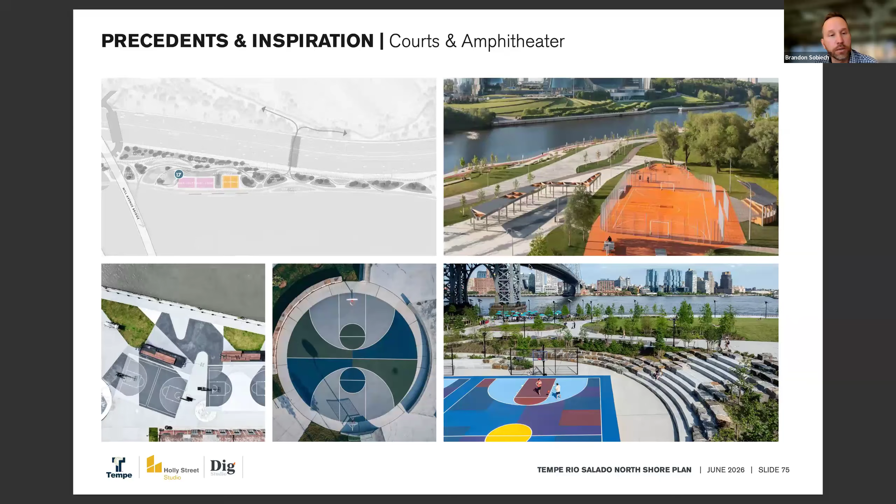Artistic ways to do multi-sport courts, something Craig has pointed out from the City of Tempe multiple times, is that you see this park from above a lot when flying in. So art at a massive scale seems like a fun idea in terms of branding and bringing vibrancy to the park, and sport courts could offer that potential.

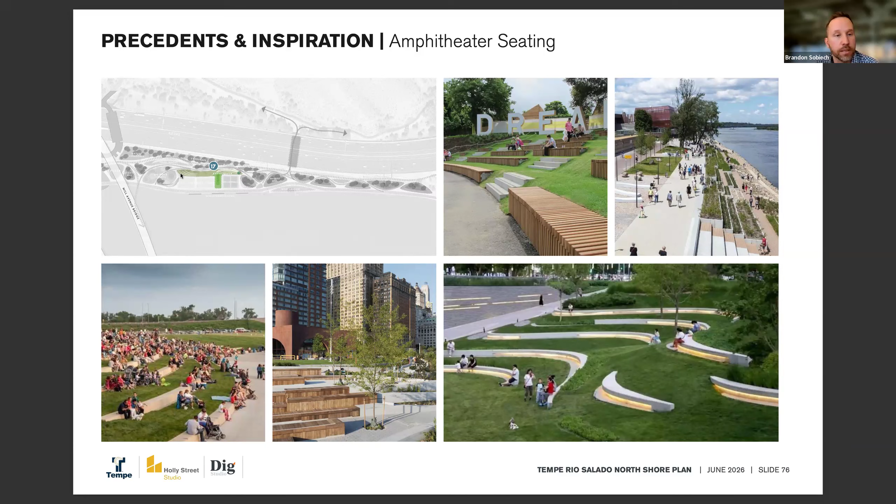Ways to activate the current topography and hillside on that site with viewing opportunities back to the Mill Avenue Bridge and city, as well as direct viewing activities to the games.

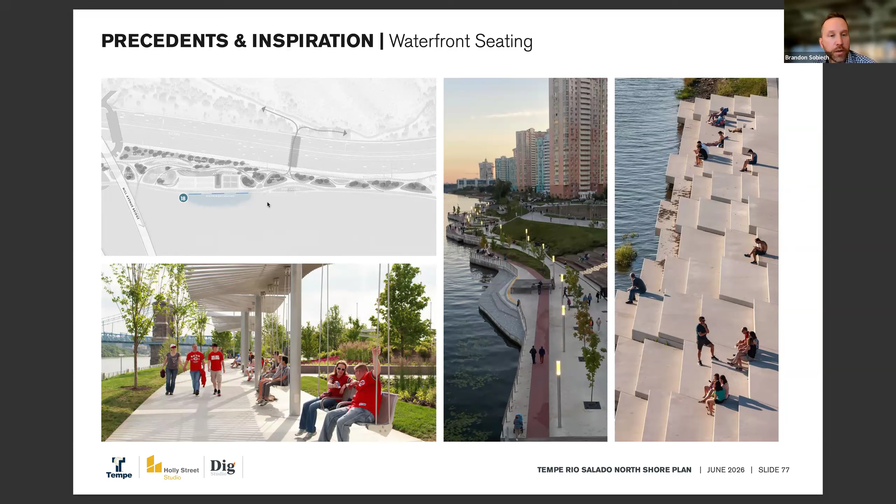One of the biggest things we've uncovered is that the little stem wall along the lake is not necessarily needed. So the idea is to perforate that in more areas to allow people to have a more intimate experience with viewing and sitting out, looking out to the water, and this could happen not only here but throughout the entire plan.

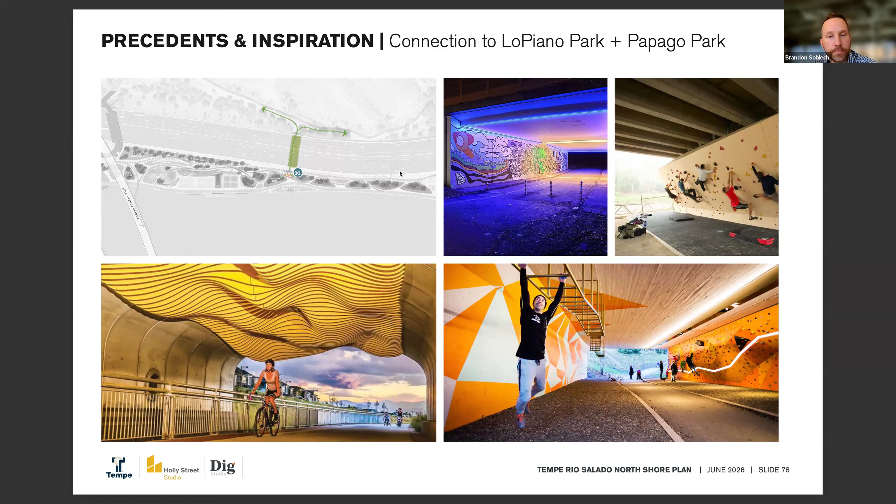But if you go just a little bit further east, there's yet another tunnel space that connects to where the marina is. So both of these, I think, have potential to be activated in a colorful and more meaningful way than they are currently.

Diane, you want to wrap? Yeah. So this is like a very full buffet table. When Brandon and I talk about it, there are many, many things and lots of precedents in places all over the world. But remember, the design driver here has to do with preserving this part of our ecosystem, of our world, making a place for people to come and gather and enjoy and be healthy, a point of pride for the city as well as the region, and a place where we can improve or lean into economic development for all parties concerned in this area, and turn it over to generations to continue that improvement.

So what you saw here today is the basis of a plan that can be some of this, all of this, a version of this, but we'd love to hear your input and begin to refine it further.

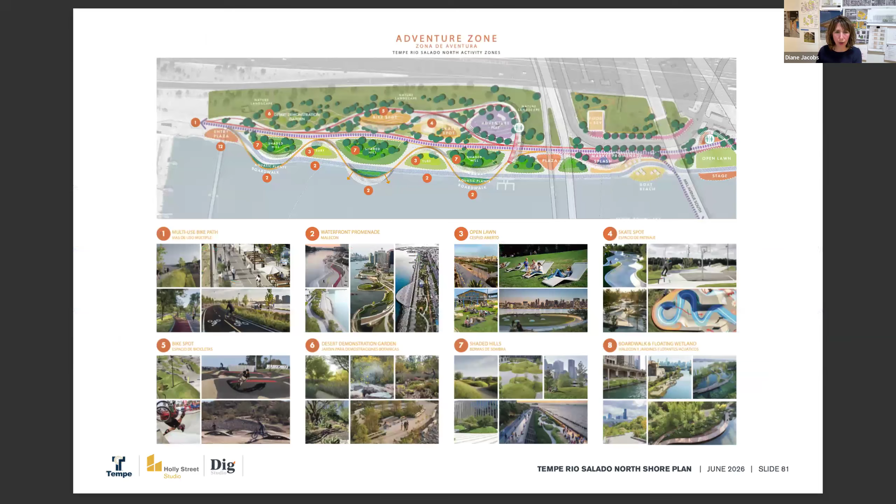Tonight these are some of the boards that will be up, some of these things you saw earlier in the presentation. The next steps are that we're going to have a public survey online that'll be open until the end of this month. There'll be a council subcommittee late this summer. The third and final public meeting where we roll out that concept plan will be in the early fall, and at that time we'll wrap that up, and that will be the guiding document moving forward to make this area, bring it to the next level of fruition. So thanks for listening, and we're really excited to hear feedback.

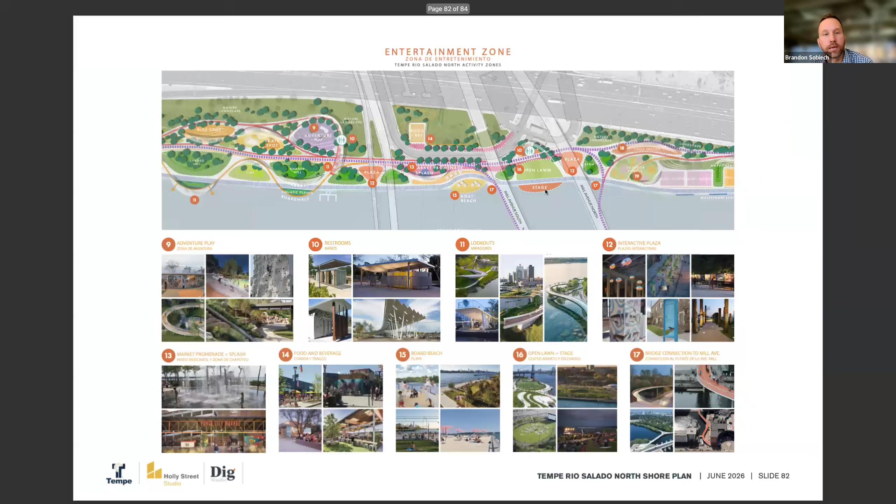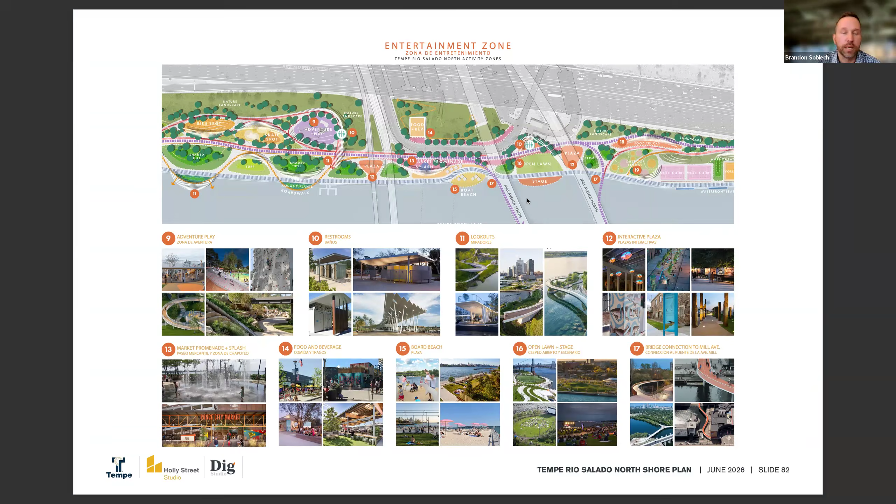Yeah, I kind of touched on that as I was going, because I was seeing the comments pop up. I think that's a really good comment. Lakeview Drive has a direct connection up to where the entry of McCain would be, and on the slide Diane had up in terms of wayfinding and art, we had identified that point as a major entrance into North Shore Park. So recognizing that both under the 202, but also through the canal trail, is a really good comment, and I think we can continue to work with the city on what we could do to improve that pedestrian connection up Lakeview to the future McCain Center. We'd be happy as the city to work with our partners at ASU just to see what that looks like as an integrated system between park, preserves, and facility.

There's a lot going on within a couple miles between downtown and up to the golf course over at Rolling Hills. Providing those connections seems natural. And I know the transportation team's got the Grand Canal Connection project, so they're making connection projects from a transportation perspective, but any information we can provide - I think that's a great comment, so thanks for suggesting that.

Okay, the next one's going to be related to your skate and bike spaces, which I know you highlighted probably after the question was asked, but just to get it on record: is there a skate park pump track in the plans? And if so, is it possible to prioritize shade or partially building underneath one of the bridges? Go for it, Dan.

You can see from the slide here that the skate spot and the bike spot have integrated structured shade as part of them, along with natural shade along the perimeter of those two amenities. As far as underneath one of the bridges, we love that idea and we're pulling that forward as much as possible. There are some conversations that the city would need to have with ADOT about how to make that work, and that ties directly to parking. But yes, the idea is to lean into that - we're going to recommend those activities at those locations.

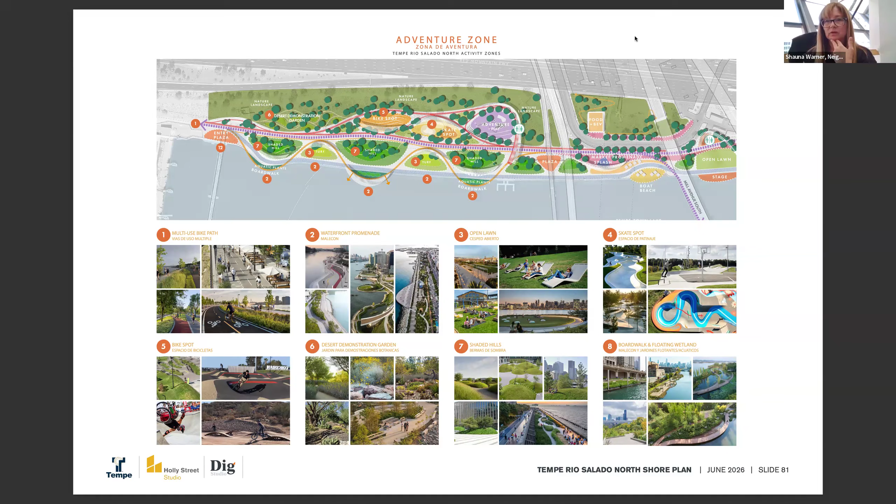Thank you. Wait, how do we find your contact info? If you look up Tempe North Shore, Shauna. Yeah, and I was going to put in the chat the direct link to the comment form. That goes back to the project website, which has Craig's contact info. I can also just send it directly to you. We'll make sure that you find that. Awesome, and with that I can make sure you get connected with the right folks on the larger park system as a whole, but would love to chat with you and hear more. Thank you. Awesome, thanks.

Shauna, I wanted to address something quickly because there are some comments here about accessibility and the elderly. It's our design philosophy, and I think Tempe aligns with this, that a place that's accessible and desirable for everyone is a good space. That's not just a tagline; the commitment is that these places would be more accessible, because anybody who's a runner already can make their way around the lake pretty easily. But it's important that we share this area with a variety of abilities and different walks of life, and this plan is designed to do just that. For folks who want to go super fast, they'll have a spot to do that as well. That should cover two comments, I think.

Yeah, and then we had another question. Then, David, I'll get to your hand. What's the budget for this project and how will it be funded?

Yeah, I can work through that one. That's going to be a key component as we refine what the plan looks like. Getting clear numbers so we can identify the different funding sources, to keep up this momentum, is going to be part of this project. Diane and team do have a financial consultant on board, and we're working closely with our budget office. We've got some placeholder funds in the out years for design work, but we want to come out of this looking at our capital program, not having identified a specific number, but knowing what all the different sources are, so we can actually start planning this, most likely in multiple phases, while keeping the momentum going. So I don't have an identified number within the budget, but that's going to come out of this project, and then we'll work with our budget office on the most reasonable way for us to move forward with different elements.

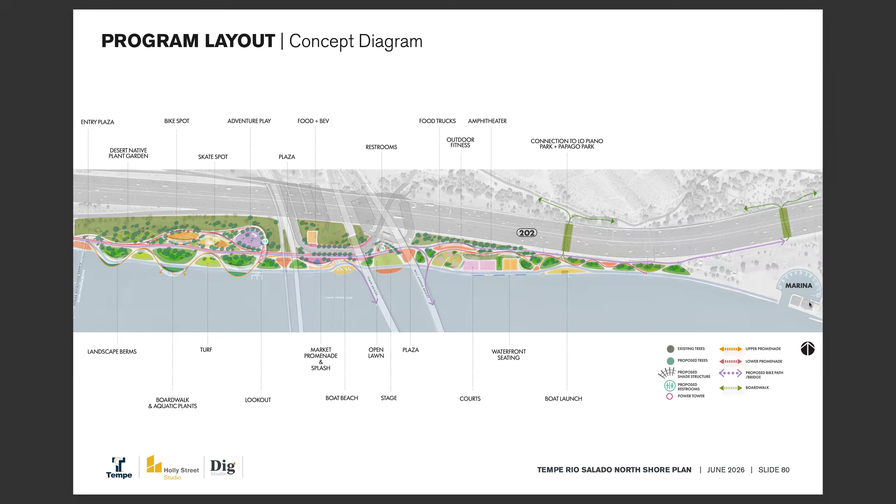It's a good comment, consider them added. That's a really good comment for the next scale, as we start showing some different shaded ramada areas, seating areas. The intent of the landscape areas is to integrate pockets where people can picnic and have passive areas just to look out at the lake, look back at the city, and be underneath the shade of trees. So yes, good comment.

Okay, the next question I have, and last one, so if anyone else has questions, please put them in the chat or raise your hand. Would any of this be potentially funded by the proposed sales tax increases?

I'll generally say I don't believe so. We typically look at our capital program, development impact fees, and other sources. I'll circle back with our budget office on that one specifically, but it's not anything I believe we're looking at, unless there are some ties to specific elements, like on the transportation side, that may go towards funding some transportation elements. So my general answer would be no, but a lot of that's going to depend on some of the examples proposed as part of that outreach process as information is shared with the public. I appreciate that question, and that may be something we can do some research on.

Okay, and I don't see any other questions. Again, we did put in the chat the direct link for comments. These materials, along with the recorded presentation, will be posted on the project website as well.